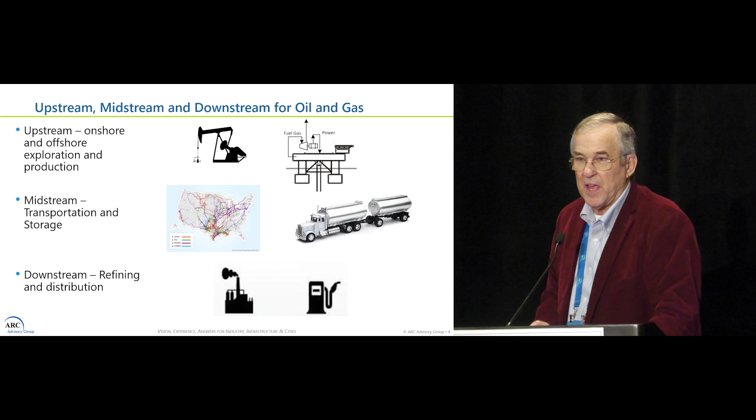I'd also like to mention another activity that's underway, 40 CFR Part 98. There are a lot of updates to that, and that's an ongoing thing. I know that TJ might be able to provide a little more insight into how this reporting is required. But if you look at 40 CFR Part 98, there are some 8,000 different facilities that are required to report their greenhouse gas emissions.

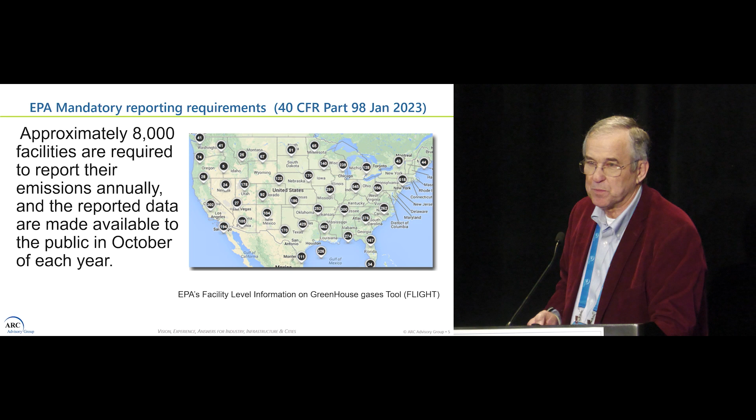Now, exactly the template of where they got the data and how they reported it is in the process of changing, to get perhaps a more rigorous, accurate representation, and not cross sections of what typical industry will do. Because some of those reports are not based on actual measurements of how much methane got flared, or how much methane was leaking at a particular flange. Some of those things are a little tricky to know about.

And in fact, if you wanted to see a number of templates, you look at all of these different industries, and you can see electric generation, aluminum, cement. All of these industries are required to report their greenhouse gas emissions in a particular format, and this is an EPA requirement. So you can imagine there's a fair amount of paperwork. There might even be some pushback,

but it does seem that the direction we're going is you need to know where your emissions are coming from. I mean, the starting point of any kind of sustainability program and net zero program is to figure out, well, what are my emissions? And we'll talk about scope 1, scope 2, and scope 3 emissions, because there are different categories of those.

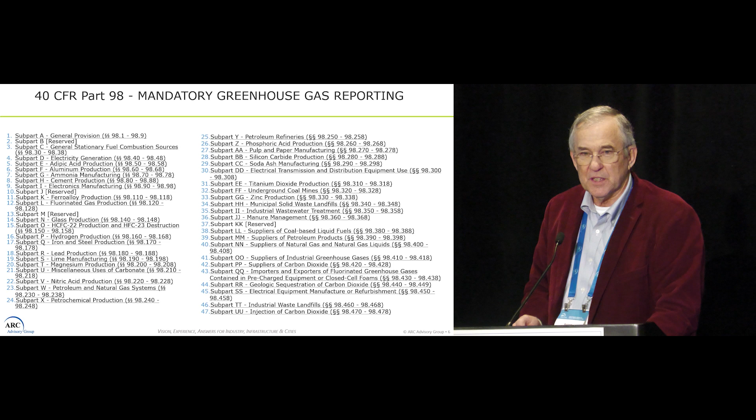So with the greenhouse gas reporting protocol, those industries that are required at a certain size to make a report are required definitely to report scope 1 and scope 2 emissions. They're optional on scope 3. And others could also opt in to report their scope 3 emissions. And scope 3 emissions, as we've seen in some of the slides earlier today, even in one of the keynotes, generally tend to be the largest overall within industry.

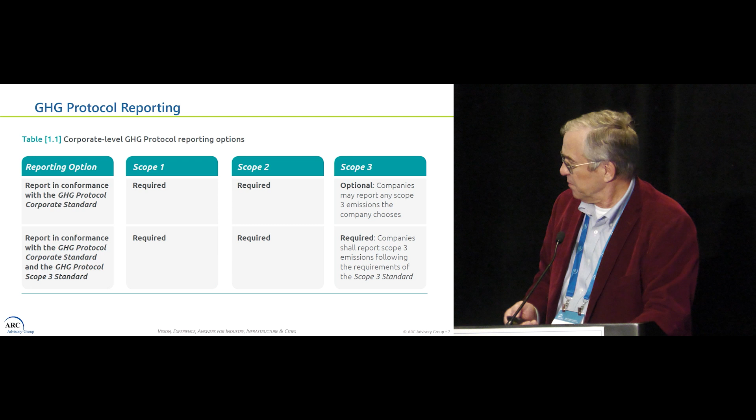And in some situations, one company's scope 3 emissions is another's scope 1 emissions. Right? So what is scope 1, 2, and 3?

Scope 1 is the direct emissions from owned and operated sources. Your scope 1 emissions are the CO2 that comes out of any smokestacks you have in your house: a heating system, a boiler, a hot water heater. What comes out the exhaust of your car, that's yours. And if you're an oil company, it's what comes out of the stacks and all of the effluents in your power plant.

And in a refinery, there's an awful lot of fired heaters. You might be able to make steam or hot oil. You have a fired heater for the reformer. There's a lot of stacks. And some of those emissions are not just CO2. It would be methane, CO2, I think HFCs and PFCs, and I think nitrous oxides are considered the main classes of greenhouse gases.

Now, scope 2 are the indirect emissions. So your scope 2 emissions would be the emissions caused from the electric power you use to heat your house or charge your car. So scope 1 and scope 2 are the emissions you would be wanting to report. And obviously, in the case of oil production, any purchased electric power or purchased fuel would be part of that scope 2 emissions.

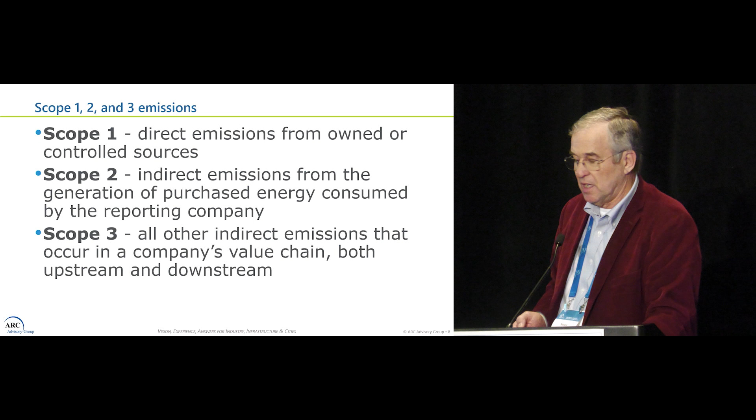Then scope 3 has 2 categories. One is the indirect. That would be the embedded CO2 emissions from all of the things that you would have purchased. And scope 3 emissions for an oil refinery would be, say, the embedded emissions. If they buy in crude oil, it would be how much emissions did it take to get that crude oil to the refinery. That would include any of the activities from drilling it out of the ground to processing it and transporting it to the refinery. All of those would be its scope 3 emissions.

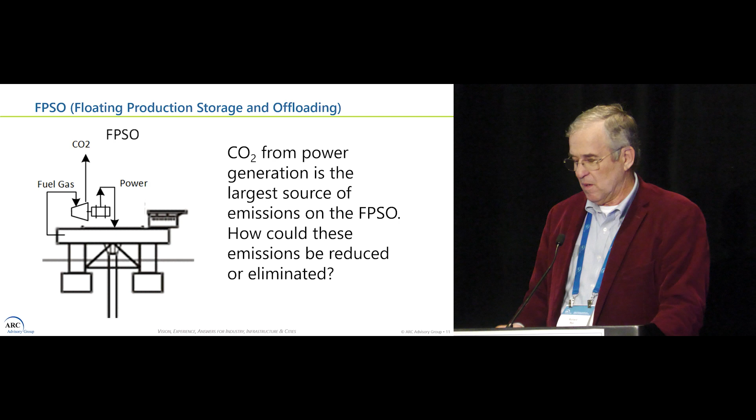And there was one other option I think one time we looked at: you could actually compress air to the ocean floor and use compressed air energy storage as another way of storing. But all three of those are very, very pricey. So what other ways might there be? All right. So let's take a look at some of the options that we had brainstormed.

And power from shore. Now you certainly could put a gas turbine with carbon capture and storage, all right? And then take that carbon and re-inject the CO2. The distinct advantage of this is that the natural gas was going to be re-injected down into the ground already. So typically, my rough rule of thumb is a natural gas power plant with CCS is roughly 30% more expensive to build, because of the monoethanolamine and the absorbers and the regenerators and all the carbon capture, than a conventional gas turbine.

And it also would use roughly 30% more gas to make the same amount of power. But using more gas to make the same amount of power is not particularly a problem for most of the FPSOs because that gas was just re-injected down there. So basically the cost of that gas is virtually zero.

And it turns out that this looks like it is a fairly popular option, because we've seen new FPSOs recently ordered by both Petronas and Petrobras that are being ordered with carbon capture and storage. That's the solution that these oil companies have decided. Other oil companies may decide something different. So offshore floating wind farm, maybe, and that might have some possibility.

We started brainstorming wild and crazy options, because some oil companies really say our shareholders are demanding we do something, we're going to spend money, all right? And some of them actually have some money to spend from what I understand. So one of the other options was floating nuclear power plants. And you see in the bottom right picture, there is a Russian Arctic floating power plant. It's a nuclear propulsion vehicle, but it also has a nuclear power plant meant to export power.

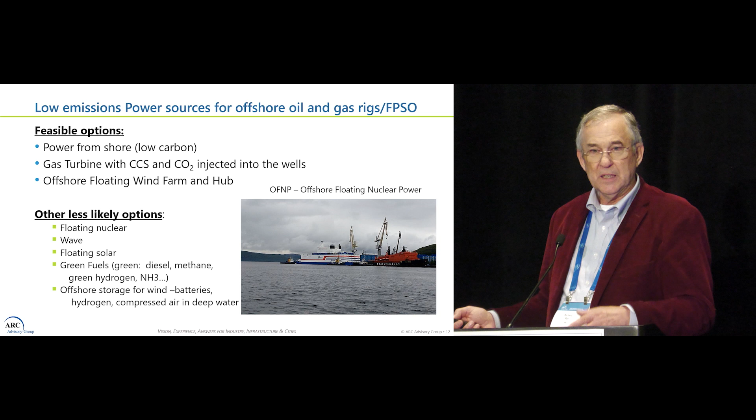All right, floating solar, wave, these things are probably not going to work too well. You could export green fuels out there, but that's a pretty pricey activity, and offshore storage for wind is also an extremely pricey practice. So I guess you kind of see the direction that we've seen them go is if you're close to shore, you can bring power from shore. You might be able to put wind to supplement that.

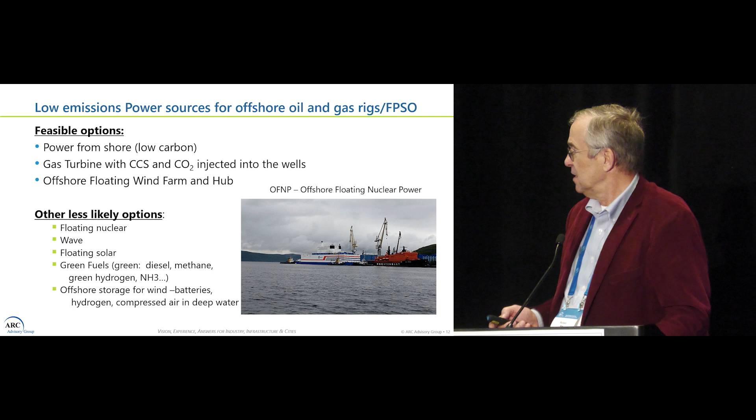Really, the CCS technology, the floating nuclear, is quite a ways off. There's a company, Seaborg, that actually is trying to develop offshore floating power plants. And there's several dozen offshore floating fossil plants that can be moored off cities to power cities. And that's not an uncommon thing. It's not super common, but.

So this chart came from OECD and IEA, the International Energy Agency, and basically it showed a summary of all the emissions upstream, midstream, and downstream. It might have helped you with the Slido show if I'd shown you this sooner, but you probably had a pretty good idea anyway. All right. So in any event, fugitive emissions are shown pretty high here.

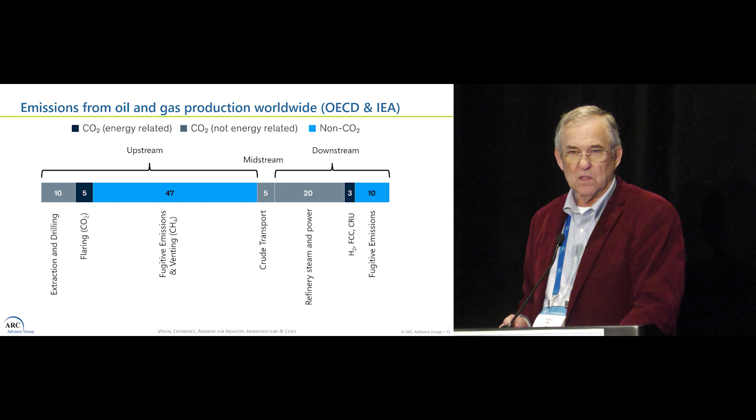This is a worldwide situation, but extraction and drilling, flaring, CO2, and then crude transport. And fugitive emissions, refineries, steam and power is a big use. I've heard the rough estimate that refineries need to burn about 5% of the crude oil, energy-wise, to process all of the crude oil into finished products. I'm not sure, that could vary from refinery to refinery.

Emissions from U.S. refineries, where does it come from? All right. Most of it comes from combustion, and if you've ever visited a refinery, there's a lot of devices that are burning fuels. You could be making hot oil or steam for general heating distribution. You have a lot of fired furnaces. The FCC with the coke burn-off is actually another very large one.

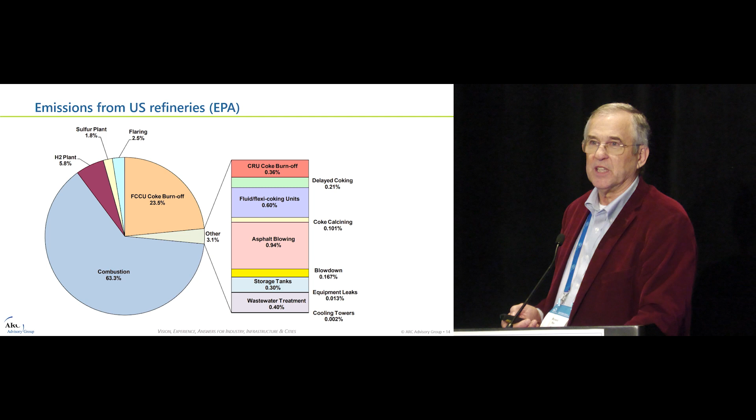I didn't realize just how big that was. A sulfur plant, making hydrogen. Hydrogen is a definite chunk, right? Maybe it's possible to import power to make green hydrogen, all right? And so that little segment might be possible to alleviate.